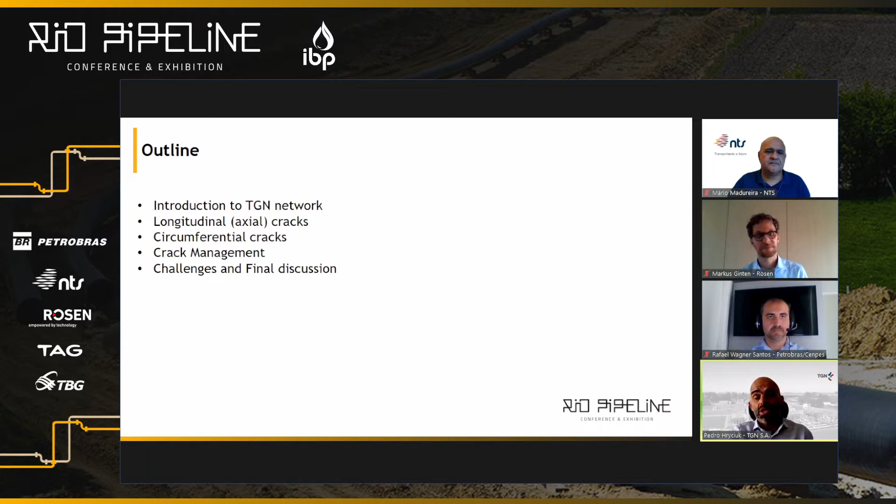So we will see an introduction of the TGN network. Then our experience with longitudinal cracks, then circumferential cracks that we have in our system too. Finally, our crack management framework, and at the end, some challenges and final discussion that we are looking for in the future.

So when we see our system, it is a big system. It has almost 11,000 kilometers of transmission pipeline, gas, high pressure natural gas transmission pipeline. So it's a big net. Then we have 21 compressor stations. We transport 40% of the natural gas of Argentina.

But our presentation will focus on the oldest pipeline that we have in our system. It was constructed in the 60s. It has a diameter of 24 inches, X52 material, and asphalt enamel coating applied over the ditch. When you see the picture, it is marked in the thick red line, which goes from the north of Argentina to Buenos Aires.

It has 1,750 hundreds of kilometers, and the MAOP goes from 75 kilos to 60 kilos. The stress operation level is 72%, which is the design stress level that was made in the 60s. So it is a big effort for us to run this line in a safe way.

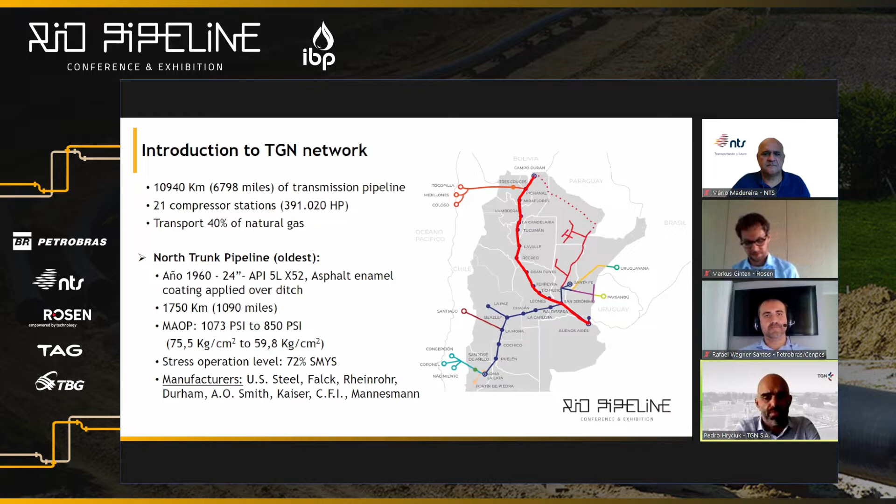So when we talk about longitudinal cracks, we have two threats in our system. First of all is the very well known stress corrosion cracking in our system, the high pH SCC. But the other threat that we found not so many years before is hydrogen embrittlement, more precisely hydrogen environmental assisted cracking. And this is a new threat that we are working with.

And the tools that we are using to detect these axial cracks are, first, the main tool is the in-line inspection tool and the spike hydrostatic test, as the API 1176 says. The benefit of this contrast between the hydrostatic test and the in-line inspection is that we can validate the tool's performance, establish a safety factor, and blunt the crack tips of the stress corrosion cracking or hydrogen embrittlement that we have in the pipe.

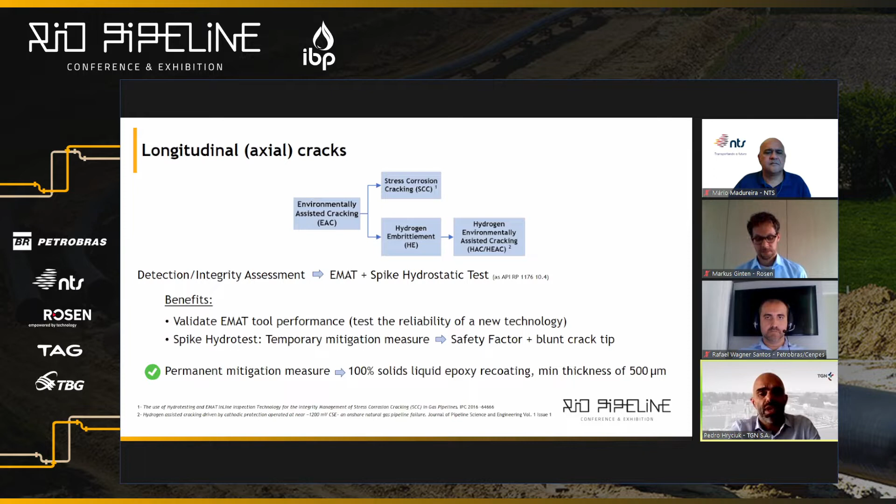Finally, the permanent mitigation that we use is the new coating, which uses 100% solid liquid epoxy, applied after the hydrostatic test or after a successful inline inspection run.

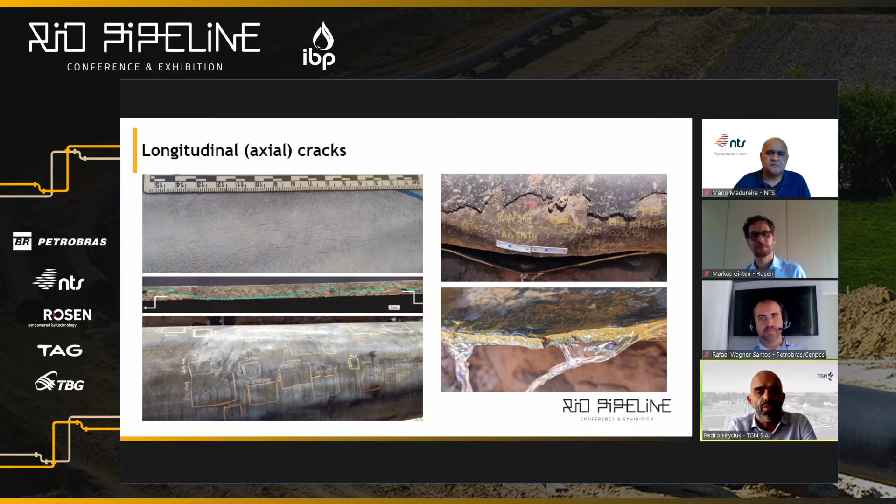The other threat we found in our system is circumferential cracks, which are more related to the manufacturing process of the pipe, specifically the US Steel manufactured line pipe I talked about earlier. First we used the hard spot detection tool, which normally detects hard spots as the name suggests, but we found circumferential cracks when we did dig verifications. So we contrasted this result with the MFL and ran the pipeline material grade tool in order to identify these manufacturers.

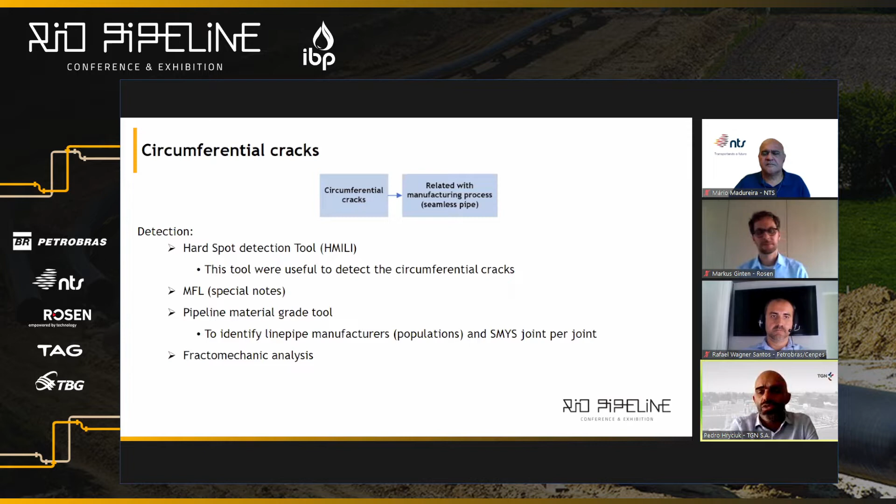Finally, when we found these cracks, we used fracture mechanics analysis. So these are the tools, and here are some pictures of the threats.

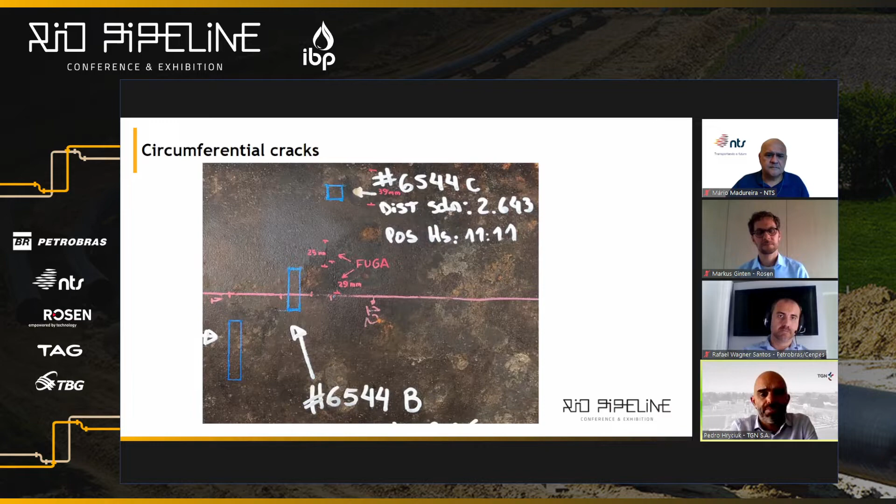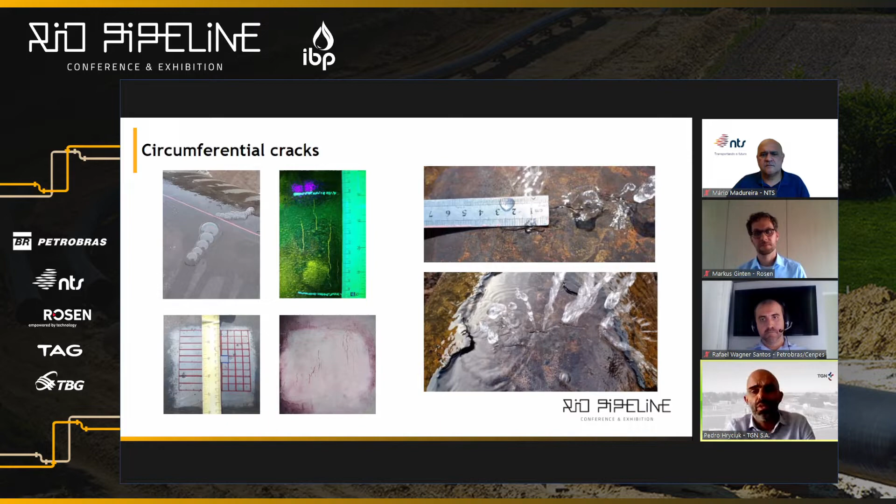Finally, our crack management framework: first we developed a crack management manual based on API 1176. We worked a lot on the ILI performance tool framework.

We hired a specialized consultant, and it was developed using our historic ILI runs covering a lot of kilometers - 1,775 kilometers - and field verifications up to 150 digs, which is a lot of data to work with.

The other thing we finally arrived at are the key performance indicators in order to accept or reject the ILI run. And finally, the review and validation of fracture mechanics calculations.

In TGN, we used to make these fracture mechanics calculations, so we hired an in-house fracture mechanics specialist, and finally we worked a lot on training and certification.

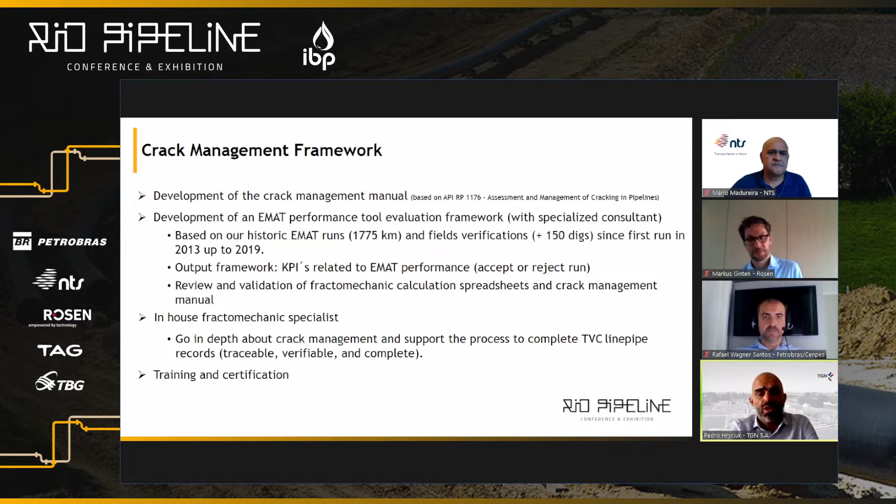At the end of the presentation, we want to share some challenges we are looking at. One point is the ILI tool validation process, where we want to increase reliability because of discrepancies between the hydrostatic test results and the ILI reports.

Here we have to work very closely with the ILI vendor. Then we will carry on with spike hydrostatic tests. We will work on continuous improvement of in-field verification tests, NDT tests, with more training and new technologies too.

We will improve the management framework, and we want to work on the ILI reinspection period between the two runs, go in depth on pipeline materials data, and finally work on understanding and development of different crack growth models. This is our experience and what we wanted to share with you.

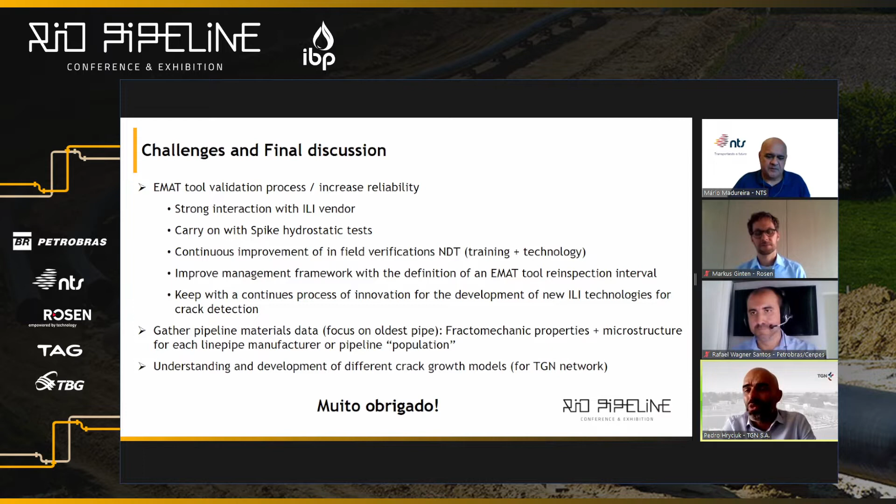Working as an operator myself, like TGN, this SCC issue is a big challenge for us to ensure the integrity of our assets. We have some pipelines with this SCC issue, and it's really great to hear your experience.

Yesterday I heard from Carlos Ranzani from TGN as well. His presentation showed how close we are in terms of actions to face these issues and improve the integrity of our assets.

I'm talking about this idea we have about how to use low-cost inspection methodologies for pipeline integrity. The recent increase in interest in low-cost pipeline inspection technologies and methodologies has been mainly due to the problem of illegal taps, which was detected here in Brazil since 2016.

This problem led to the need to increase the inspection frequency of each pipeline, which becomes very expensive when using traditional ILI tools. So the idea is to use these technologies more often, to try to detect illegal taps as soon as possible in our pipelines. That's why we are looking for low-cost inspection methodologies. A program for testing and developing low-cost ILI tools was created internally at the company. It's about a 5-year program so far.

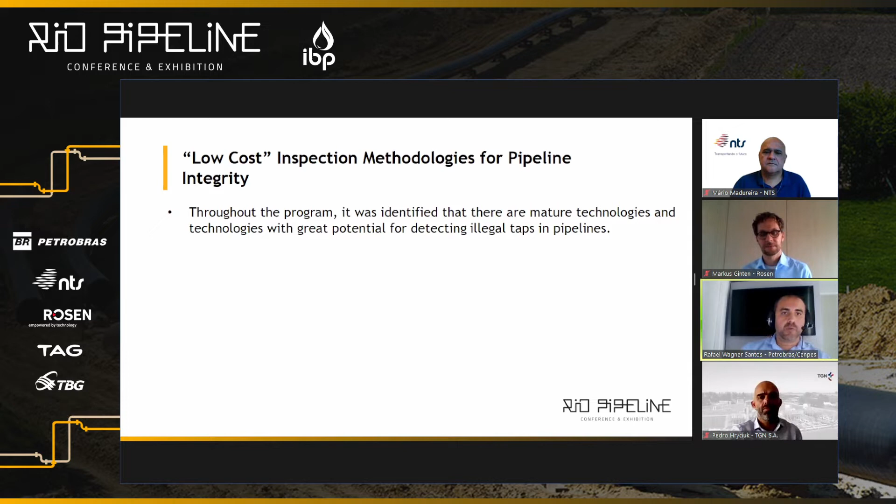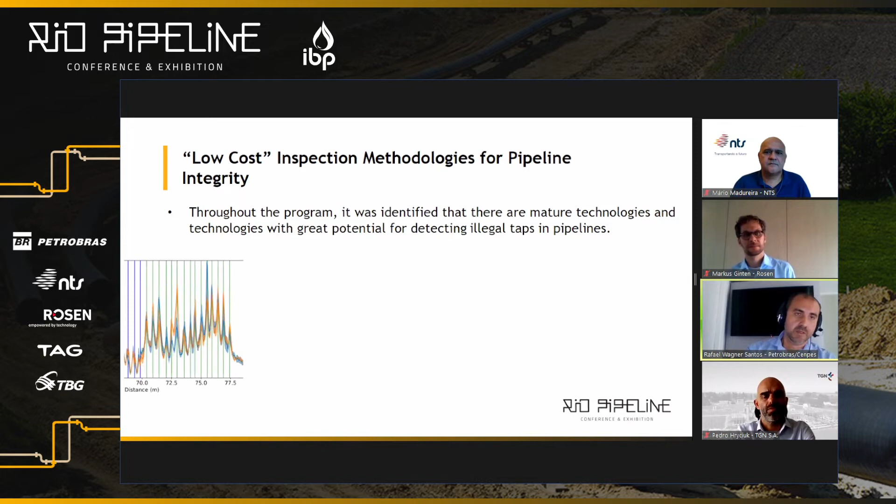Throughout the program, it was identified that there are mature technologies with great potential for detecting illegal taps in pipelines. As an example, alongside this program, we constructed a pipe loop with different types and sizes of taps. We have tried different technologies in the market in this pipe, and we have partnerships with Brazilian universities to develop this technology as well.

As an example of some of these technologies, in the bottom left, let me point here, the laser. This is a section of the pipe loop where we have 18 taps in sequence, and you can see that one of these technologies could detect these taps. You have blue and orange lines here - that's because you have more than one run - and you can see that for each run, they were able to detect these taps.

So this is one kind of technology, and this is how they show it - they show the signal, like an A-scan. If you're used to ultrasonics, you have the amplitude and the time or distance here. This is the way they show the signals.

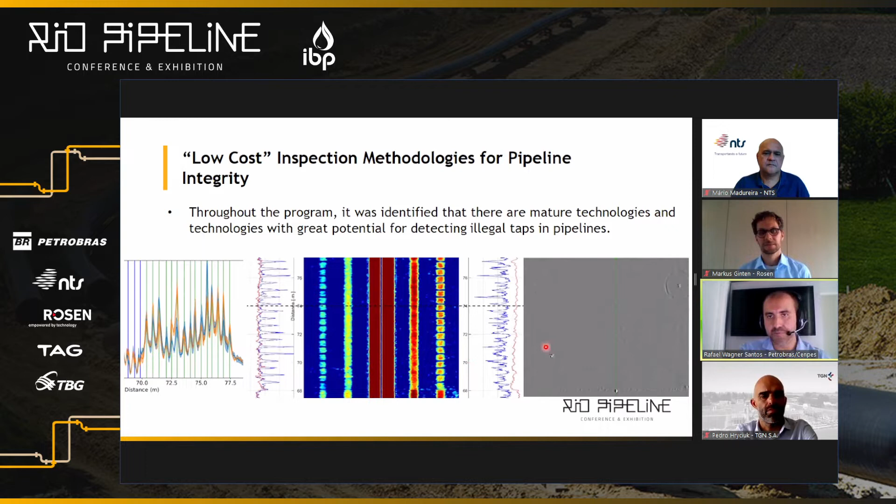So you can use low-cost technologies to detect illegal taps, but would it be possible to go further and use these technologies to detect other failure modes? How about using low-cost methodologies to detect and measure corrosion, for example?

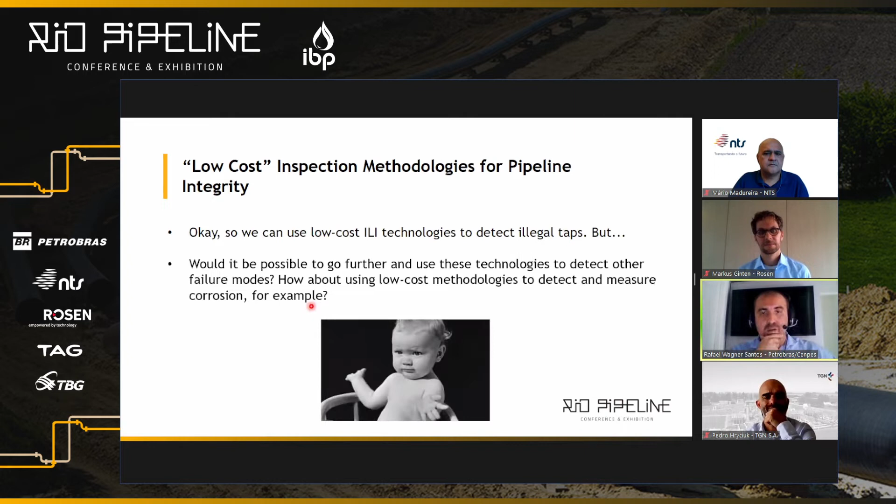Who knows? Huh? Why not? So let's try it. So what's the concept for this low-cost inspection for corrosion now?

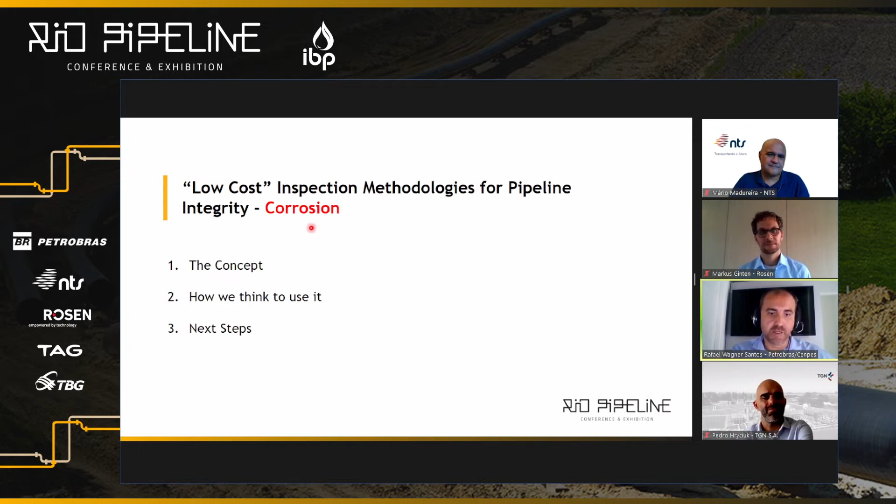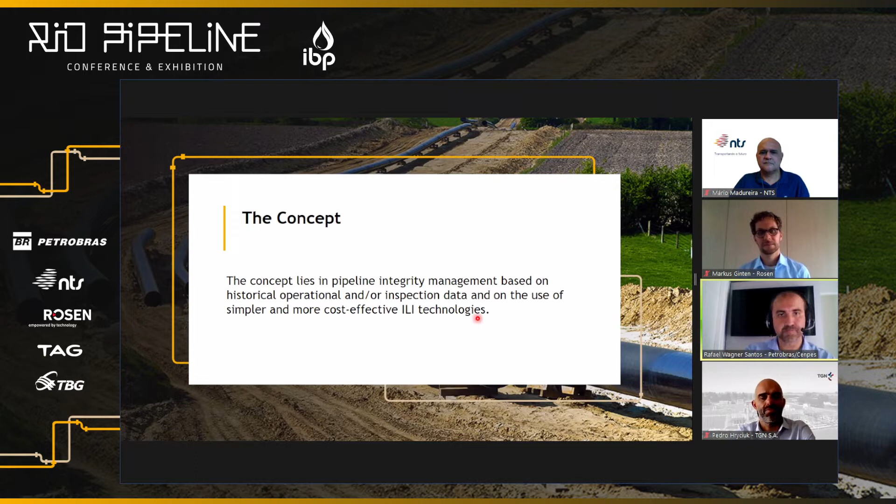The concept lies in pipeline integrity management based on historical, operational, and/or inspection data, and on the use of simpler and more cost-effective tools, and how we think to use it.

So there is an ongoing pilot project for subsea pipelines, and the choice to start the application of this methodology in subsea pipelines was due to the fact that the prominent failure mode of this pipeline is internal corrosion.

As this is the prominent failure mode, we have more controlled parameters. So we have sensors that measure internal temperature and pressure. You have periodic chemical analysis of the fluid. We have corrosion coupons that we can check to see how corrosive the fluid is. So you have many operational parameters that give you information along the operational life.

And for subsea pipelines, at least half of these pipelines are piggable. So we have also the pig data. We can compare the operational data and inspection data, pig data, and then check a correlation between these, and try to make a correlation of this information.

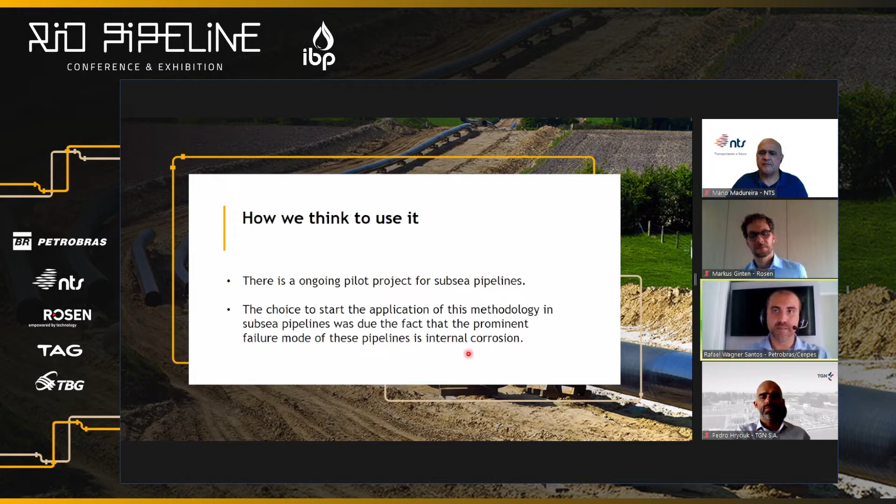So there are some examples of low-cost tools. When I mean low-cost, it's because they are very simple. Just for clarification, this is not to scale. This is a very small screen, very small sphere. These are a kind of single module pigs - very simple pigs with some sensors.

In the past, some may call this ICIP, that's integrated cleaning and inspection pigs. So it's like a cleaning pig with sensors.

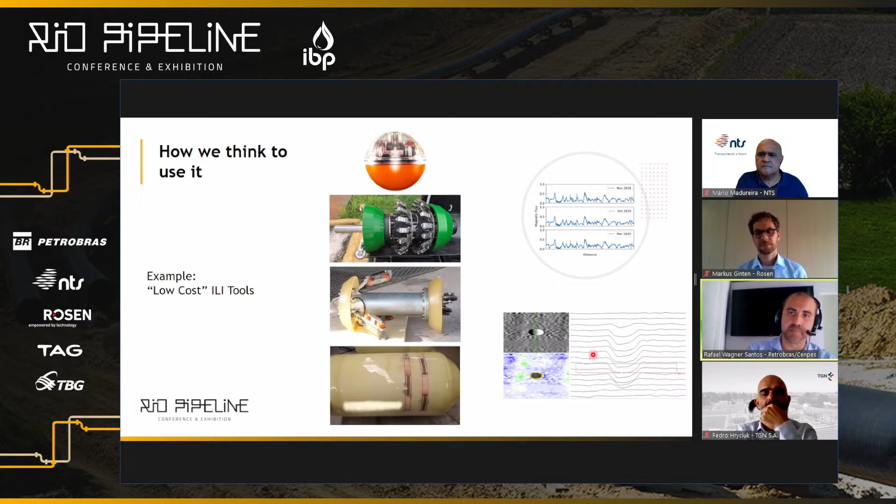And these tools you can use, for instance, for comparison data. If you run these technologies every year, you can compare data to check if there are differences between one year and another, or even to check the corrosion and measure the depth itself. It depends on the technology, depends on the tool that you are using. Some of them have this capability, others don't.

So, about historical operational and inspection data - let's think here. Suppose that we have the pig data and the operational data. If you have a cross relation between this data, you can check, for instance, this example.

If you have checked for many pipelines, you have seen, for instance, that for pipelines with more than 15 years under operation, if the corrosion coupon rate was more than 0.03 millimeters per year, the pig detected defects with more than 40% or 50% of the depth or wall loss. And for instance, between 0.02 and 0.03, with more than 15 years, the pig detects between 30% and 40%, and so on. It's an example.

So we can put this in a matrix, placing pipelines based on their nominal thickness and based on the potential production losses as a consequence of a failure, and use this as a basis to select pipelines for these low-cost special technologies. So you can see here, if you have a low historical coupon and corrosion rate, and a higher nominal thickness of this pipeline, the pipeline is in early operation.

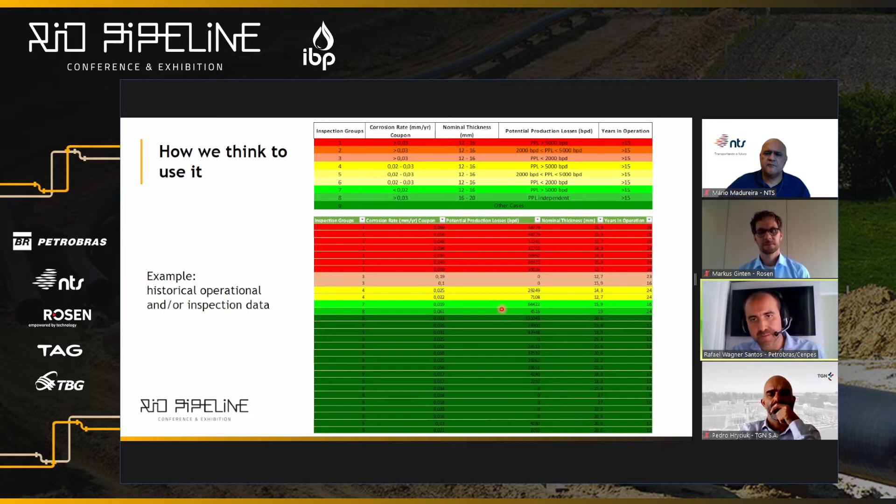And even in this situation, if these lines are piggable, you can choose the technology for one of these lines to check the integrity of these lines here. So in this example, at least half of these pipelines could be inspected by low-cost technologies, and you can save money in your integrity management.

So, what are the next steps? Are we comfortable now with this low-cost technology? Not so far.

So we are starting a qualification program using a pipe loop with controlled anomalies as a reference. In this pipe loop, you have different types of anomalies with different associated wall losses - general corrosion, pitting corrosion, axial groove, whatever - with different associated wall losses. And we will establish detection capability and sizing accuracy of different low-cost technologies.

And then after this, we will have a general overview of the capability, the POD, and sizing accuracy of this technology. And also, for some technologies that use magnetometers, this kind of program with notched defects maybe isn't the best approach, so you use a subsea pipeline as a reference for this.

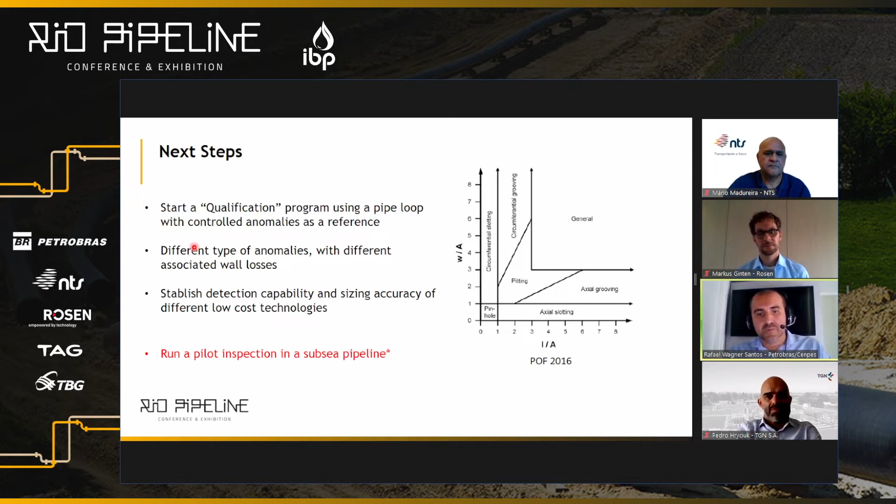So this is what I would like to talk to you about regarding low-cost inspection, and I hope to see you in 15 minutes for discussions. That's it, Mario.

Hey Rafael, thanks a lot for your presentation. Very good presentation, and I'd like to congratulate you and the team for these efforts. Amazing job you guys have been doing. A lot of creativity, a lot of technical competence in there.

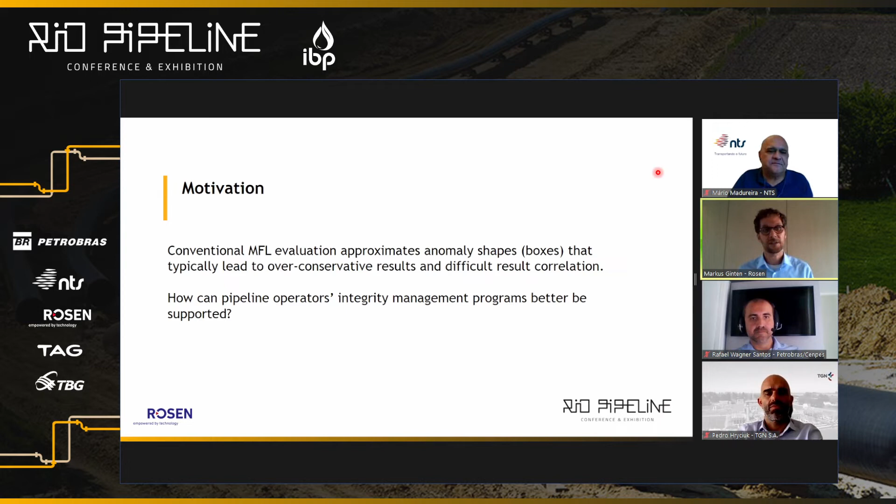As Mario said, the topic of this presentation is advancements in MFL ILI data evaluation - where is it heading? The motivation behind it is that conventional MFL evaluation approximates anomaly shapes. So what operators are provided with are boxes in terms of length, width, and depth. This leads typically to over-conservative results. We have an example for that, so I will illustrate that. Also, the result correlation between repeat inspections is rather difficult. So we were asking ourselves, how can pipeline operators' integrity management programs be better supported?

To answer that question, we will first have a look at a high level background on the MFL technology, axial and circumferential MFL. Then we speak to conventional data evaluation - what does it mean, what is being done as of today. And then we speak about new technologies - one is AI-based data evaluation, and the other is the so-called deep field analysis, before we come to the summary.

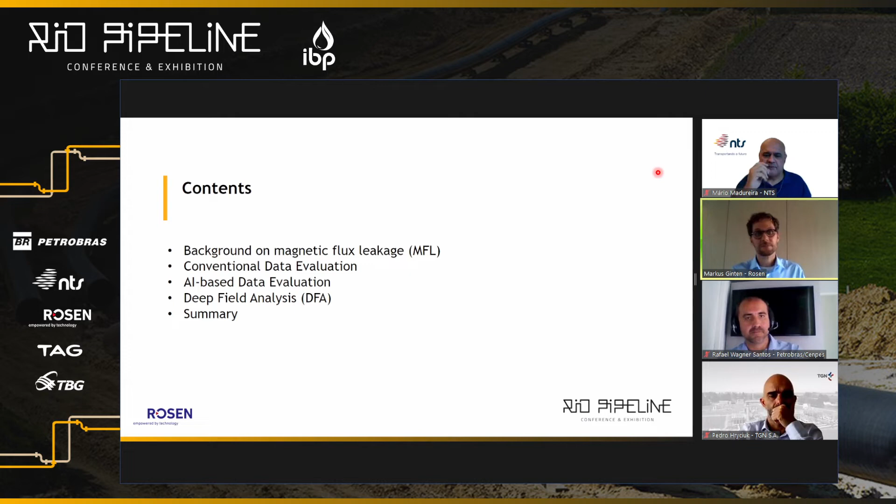Okay, the background on the MFL technology. Essentially you have two technologies, differing in magnetizing direction. The more classic one is the axial MFL, abbreviated MFLA, where you magnetize the pipe wall in axial direction, also illustrated here. The magnetic response, the leakage, is high if you have a circumferentially oriented anomaly, or an anomaly that has at least an extension in circumferential direction, a larger one like a round anomaly for instance. An axial anomaly, though, due to the magnetic direction, the response is rather low.

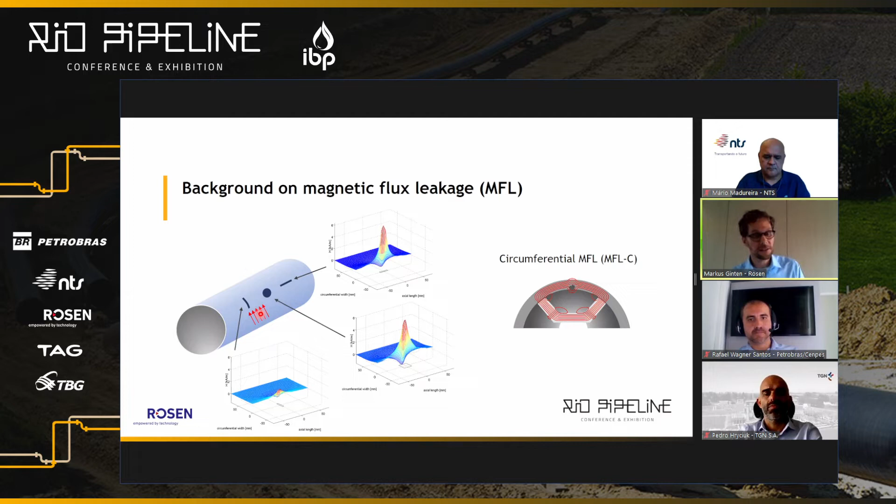In contrast, with the MFLC, the circumferential MFL, it's the opposite way around. You get a high response for round anomalies. For axial anomalies, you get a strong response, but for circumferential anomalies, the response is rather low. This needs to be considered in the methods, depending on what you want to achieve.

That is a population specification that, in general, if you count all anomalies, is kind of valid, but there is differences between individual anomalies. So when you look at an individual anomaly, the signals do not necessarily exhibit a normally distributed error, but the result is influenced by factors like tool speed, debris, anomaly shape, and so on and so forth.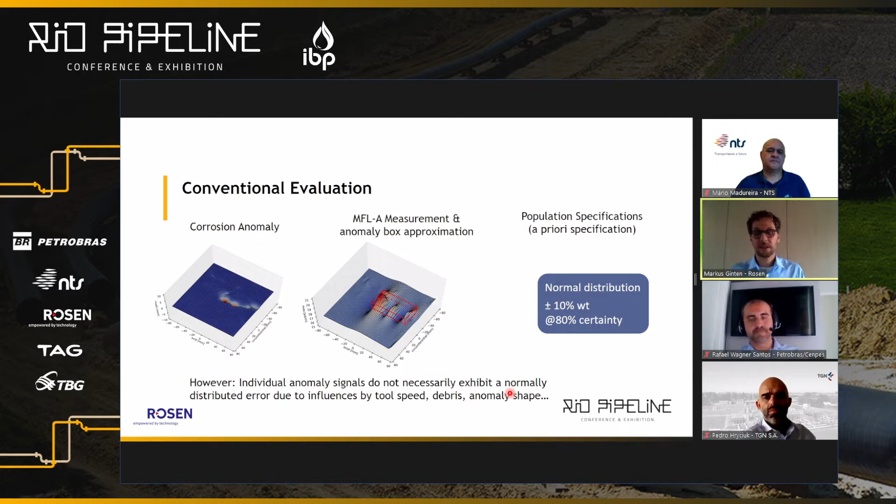Now the effect of the boxing method. What we see here is an example of repeat inspections with a 5 year time difference in between. It resembles, so the profile is very similar, as you can see, but there is some evidence of growth. Here the maximum is about 18%. We do have a constant RSTRENG, the effective area here. The real one did not change between the inspections.

Just by transforming the signal response by the MFL technology, in this case an axial MFL tool, into boxes, this is the result in terms of boxes. What you can see is the shapes of the boxes have obviously been changed. There's a variation, but there's no clear corrosion growth evidence in terms of depth.

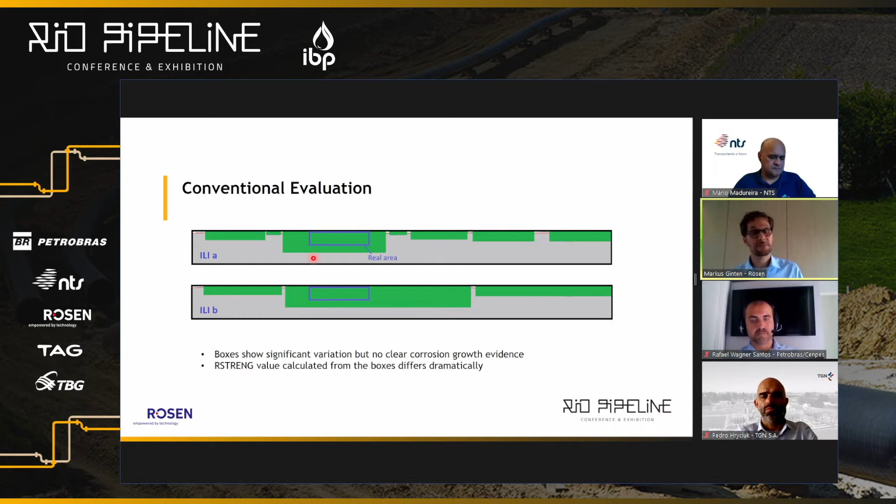And also what you can see is that the real area, the real RSTRENG area, is smaller than what we are reporting, or what is being reported by boxes. This is a conservative way of going about things, but certainly there's room for improvement. How can we get that?

For one, there are AI-based methods, and we have been working on AI for quite a while. We do apply it, and this is a new method that we are working on, and that is transforming the MFL response, the signal response, in terms of magnetic flux leakage, into anomaly shapes. We are using a method that we at Rosen call direct inversion, meaning the transformation of MFL data response into profiles. This is a predicted depth. It's not really calculated, it's knowledge-based.

It's AI, artificial intelligence. And when we zoom into a couple of anomalies here, what we see is an approximation compared to validated laser scans. It still gives you a good picture of the anomaly, I think, but all the details that you can record with a laser are not recorded by this transformation.

So what we can already conclude here is that profiles versus boxes, it's less conservative because you get a profile as opposed to just a box. And if you compare profiles between repeat inspections, that's much more comparable than just boxes.

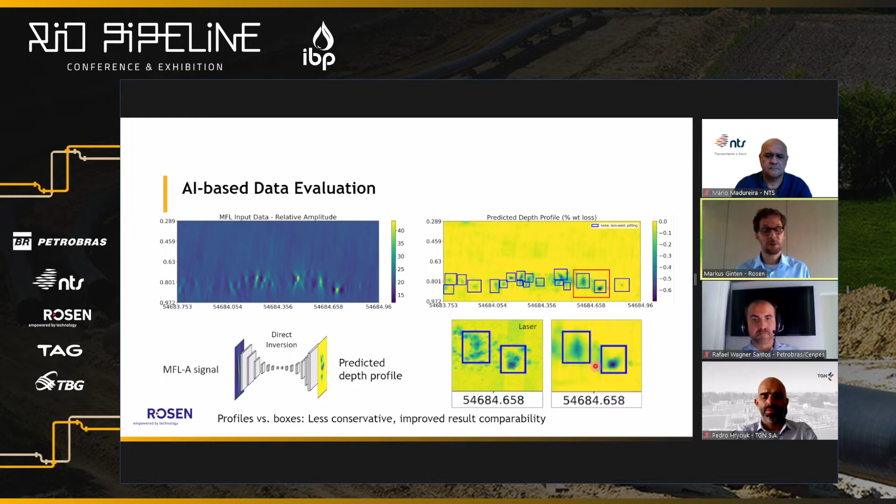Another thing that comes with the AI method is you want to explain it. It's going in the direction of explainable AI to overcome the criticism of AI that it would be a black box. If you handle it correctly, it's not a black box actually.

So we are generating, as stated, these profiles, and it's knowledge-based. It gives you multiple - I'm turning on this animation - it's giving you a multitude of possible profiles and also a multitude of possible boxes, and then a distribution with the most probable anomaly depth, length, and width. Depicted here is the wall thickness. And by giving you the most probable dimension, it is reducing the uncertainty.

There's also another aspect of it, which is that MFL signals are not always clear - there is some ambiguity in there. Sometimes what you get is a bimodal distribution, and that can happen. This helps you to identify potential outliers.

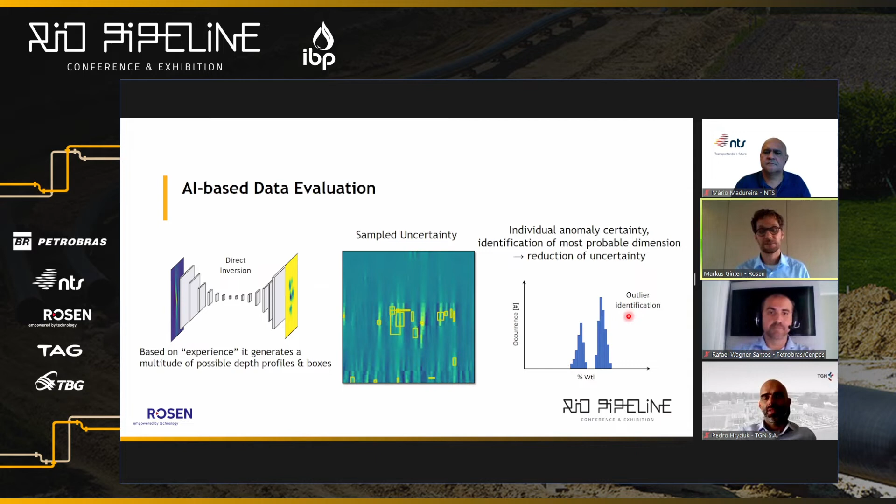So last but not least, the deep field analysis method. As opposed to AI, it's not a prediction or estimation of the profile, but a direct calculation of the profile. And how it's working - what we have here is the axial MFL signal, as recorded, and a calculation of the profile from that recording.

Then what is being done is you can calculate back the signal from this profile. If this matches, the calculated profile matches the recorded one, then you have a fit, then you're working with this. However, if in the first iteration - which it usually doesn't - it's a multitude of iterations, it does not fit, it goes back and optimizes it. So this is a very calculation intensive method.

Now looking at MFLA and MFLC combination. So if we have a picture of that anomaly in terms of MFL signal in both directions, the profile gets much more accurate. It looks different to the MFLA alone, and this is also an axially oriented anomaly, as you can see. So there's no surprise that the MFLC has a better response or a high contribution to the accuracy of those results.

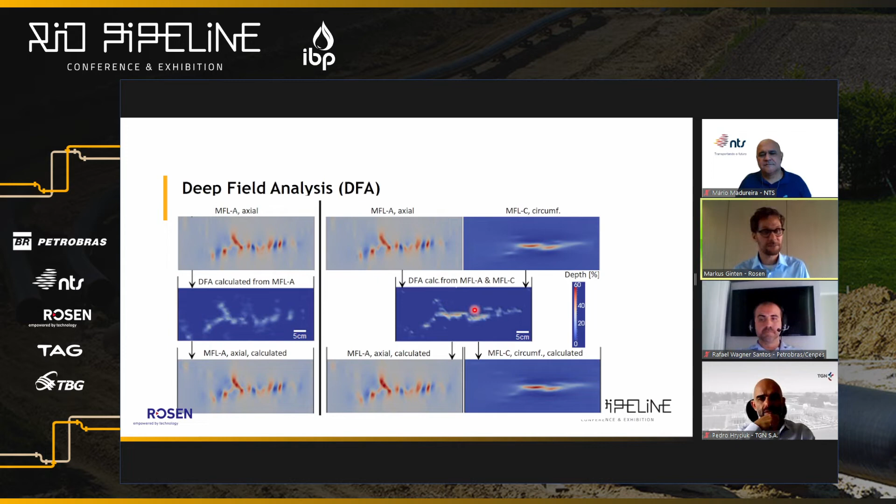What this shows you is on top of the screen, the upper three pictures are calculated from both responses, MFLA and MFLC signals. So you get a calculated profile, and what you see at the bottom are laser scans, validated data. These were blind tests, and the term we use for this is a virtual dig-up.

As you can see, the profiles are very accurate, resembling the laser scan very closely. When we look at the quantification, we see maximum depth, 33.4 compared to 37.9%. The calculated burst pressures, which is maybe even the more important aspect, show really accurate burst pressure calculation. Of course, depth is also important, and as you can see, it's in the area of maximum 4% difference. Here, it's even just 0.5%.

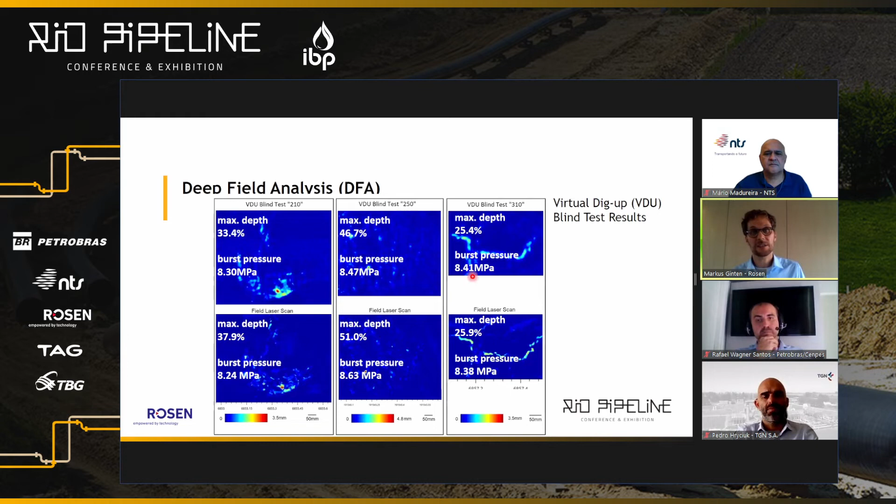So in summary, we've looked at these different methods. The conventional method is absolutely knowledge-based, based on the experience of analysts, their training, plus experience, and the parameterization of the MFL signal. From the evaluation, you get the box in terms of length, width, and depth. It is applicable to MFLA or MFLC.

What it comes with is this population specification that we talked about, which the integrity group later applies to all reported anomalies. It's applicable to entire pipelines and is available today, unsurprisingly. It gives very conservative results, with an overestimation aspect, and the result correlation is rather difficult.

Now coming to the AI method, it's also knowledge-based, but it's a machine that knows things. It's trained on a lot of validated anomalies, and can be applied on MFLA and/or MFLC. We've shown examples from MFLA only in this presentation, but in principle you can apply it to either or both.

What you get is profiles and boxes. The profiles, as explained, are a prediction. What it comes with is an individual anomaly specification, which reduces uncertainty. It's applicable for entire pipelines, and the calculation is actually rather quick for an entire pipeline. We already apply it today.

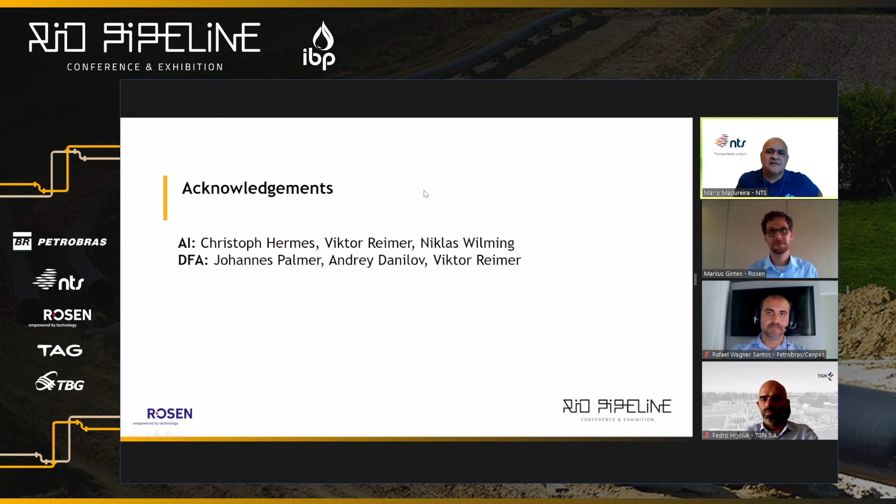Yeah, and Mario, I'm actually looking forward to the questions that we possibly have. Okay Marius, thanks a lot. Excellent presentation. It's amazing how artificial intelligence is provoking such a burst in the technologies that support the integrity assessment process. So I suggest IBP think of a new edition with specific sessions on how AI is supporting the integrity assessment process. Thanks again, Marius.

What is the spike test pressure used? Is it more than 100% SMYS? What is the duration of the spike test? And also, during the recoating service, do you also inspect for cracks with MPI, magnetic particle?

For the first one, the spike hydrostatic test is a test recommended by the NTSB, the National Transportation Safety Board of USA, and they recommend the hydrostatic test be made from 100 to 110% of SMYS. This is the range of stresses we have to put on the line in order to blunt the crack tip or go to a rupture. So these are the stress levels, and the time they recommend is at least 30 minutes. So these are the answers for the hydrostatic spike test.